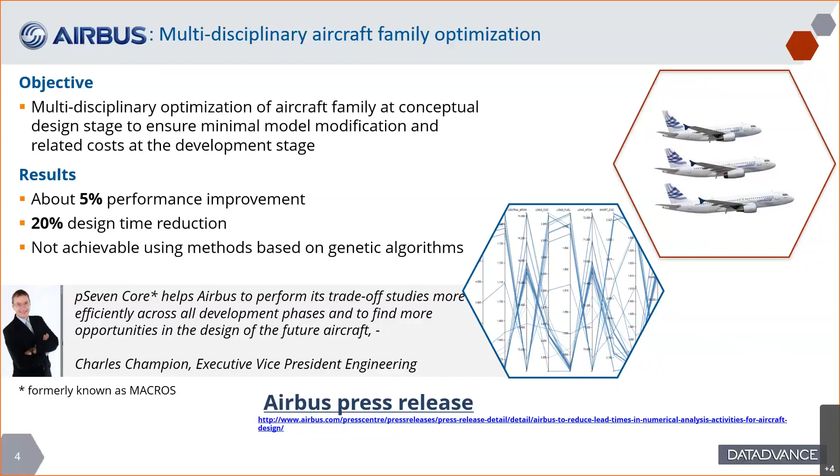Meanwhile, as I said, we expanded in other industries. So I just wanted to share with you some successes that we had with, for example, Japanese automotive companies. We have many references there. One of them being Mitsubishi Motors, where our predictive modeling technology allowed them to build some predictive models for combustion engines and export them into neutral formats

so that these mathematical objects representing the combustion engine are then subsequently used in a 0D, 1D simulation environment, so a multidisciplinary environment for acoustic simulation. That was the use case. We've done that because pSeven indeed allows you to export in neutral formats, such as FMI, for example, or an Excel sheet or C program.

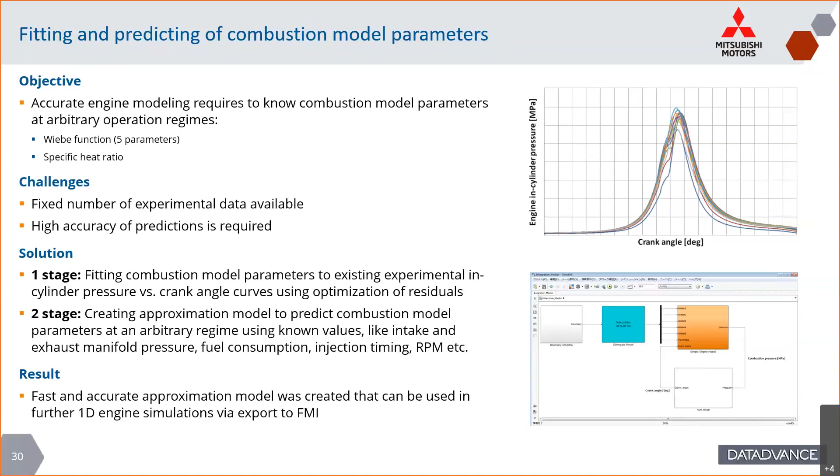Another nice use case in automotive is a well-known and challenging benchmark called MOPTA 08. I think it was invented by General Motors back in the days in some US universities. The challenge here is to tackle a very high dimensionality optimization problem with more than 100 variables, 68 inequality constraints, but within a given budget. And the budget, considering the dimensionality of the problem, here it was crash simulation, is very small. You see, it's less than 2,000 points for such an amount of variables.

It's definitely small. But thanks to our technology, we were able to tackle that problem and actually find the optimum value in an amount of points which is actually less than this total budget. So with 1,600 or so iterations, we can get to the optimum. That was a nice success.

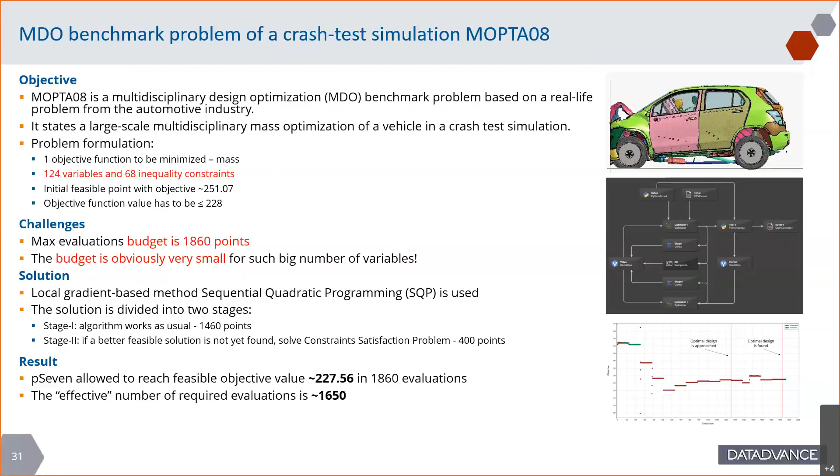So let me speak about the technology itself and what is different with our solution. So we fit in the fourth era, the era of cyber physical systems. And in that era, you need to provide software technology enabling, for example, the collection of data from an assembly line or a system in operation. Then check that data against predictive models and potentially take some corrective actions if something goes wrong, or to enhance the performance of the system.

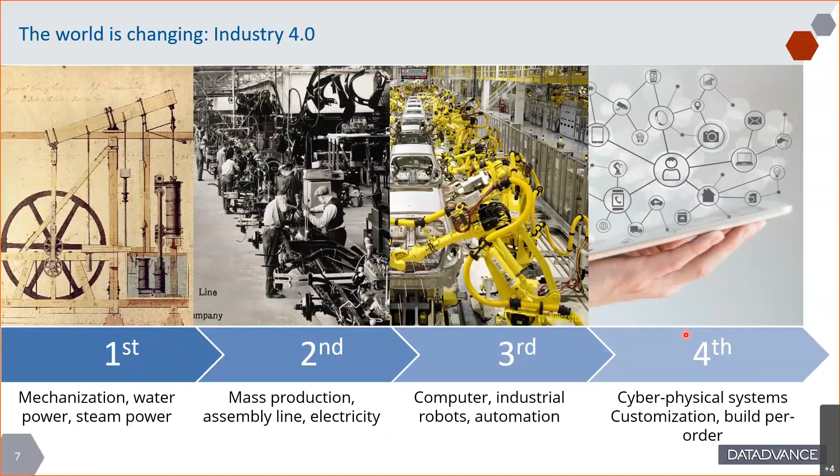So you have software discussing with the hardware, and all of that managed by algorithms and artificial intelligence, for example. So this is where we fit. If you think about all these buzzwords that you have on the screen right now, like machine learning, predictive analytics, or even MBSE, they actually all refer to the same concept, which is what we call a smart model. You can also call them a predictive model or meta model.

These are actually very light mathematical objects, mathematical models, which work as a function. So you provide some inputs and it gives you some output, but it does it in a fraction of a second. And this is the benefit, of course. The speed of these models is so high that by substituting a heavy model with this, you can then accelerate your design process.

So these models are, of course, the know-how in the company, and we know how to build some very high quality models, with a level of fidelity which is very close to what you can get using a 3D simulation or even test. So these models are built, as you can imagine, from data and using machine learning and artificial intelligence.

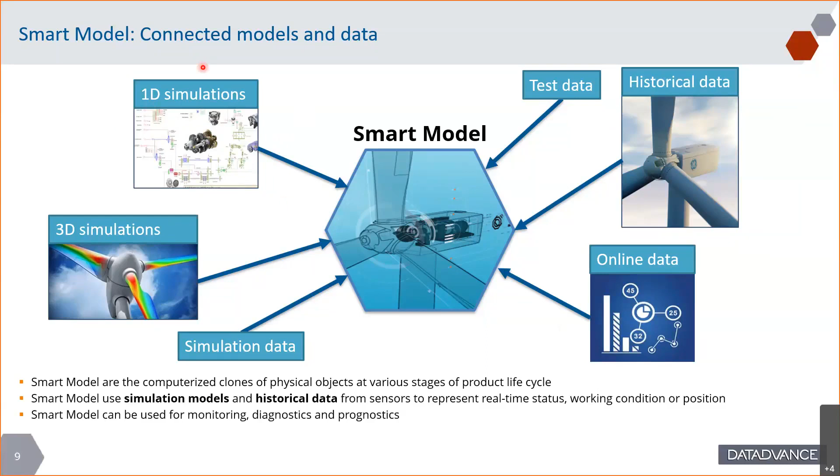The data set you can use might come from existing data, historical data, or you can, of course, generate such a data set by running simulation. And for this, you need, of course, a workflow engine. So that is a good transition to the main capabilities of our technology.

So we develop a product called pSeven. pSeven is an engineering process integration framework, which embeds also design space exploration capabilities and machine learning capabilities. So the main pillars are these ones. You have a workflow engine enabling the capture of any engineering workflow. It has to be very flexible, as you can imagine, so that you can capture any workflow, whatever the software, the zoo of software that you might need.

Then we provide design of experiment capabilities. So how to change all the parameters of the system and assess various combinations of these parameters in an efficient way to minimize the number of evaluations, so that in the next step, using machine learning techniques, we can produce some predictive models. And these predictive models can be inserted into the design process, which can be more global.

In that design process, you might find then optimization capabilities. This is where we are very strong. We provide optimizers that can find the global minima with a very limited number of evaluations, because in some cases they are extremely expensive and you cannot afford having thousands and thousands of simulations.

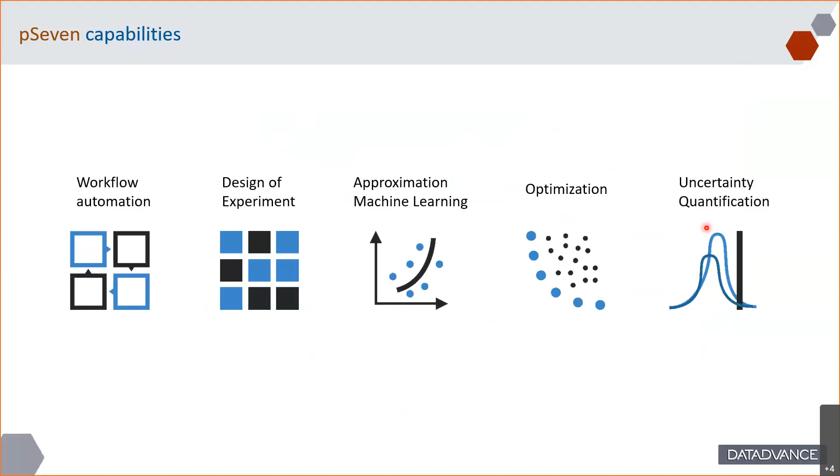Talking about the product line. We started with algorithms. Our roots are pure mathematics and algorithms. So the first product that was on the shelf was pSeven Core. This is a Python library. Then 2 years after that, we released the framework. This is a graphical environment. You will see it today, where you can capture your engineering workflow and run all these algorithms.

And finally, last year, so this is quite a recent event, we have released this cloud solution now called pSeven Enterprise. pSeven Enterprise is a brand new and native cloud architecture, which is derived, as you can imagine, from pSeven, to allow, let's say, collaborative work. I'll come back on this in the next slide.

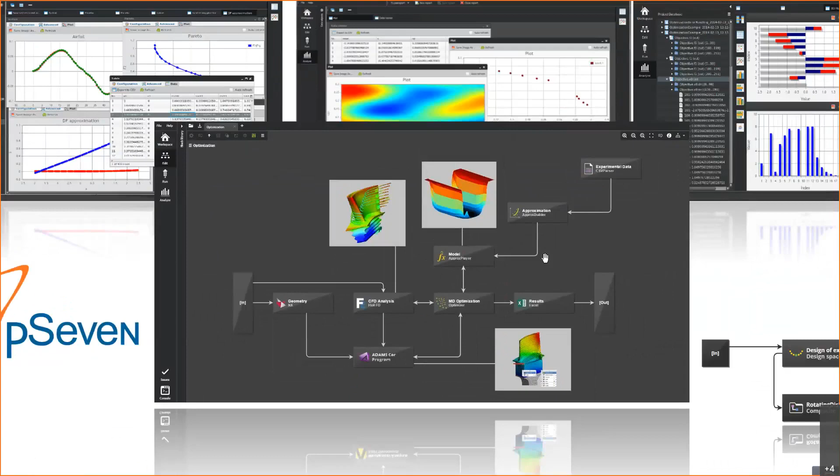So this is what pSeven looks like. The desktop version, at least, looks like this. You see here a typical workflow captured by the user, and this one combines, let's say, a CAD update with some simulation. Here it's maybe Adams. We have CFD simultaneously running. So this is really a complex multidisciplinary workflow. And all of that is actually feeding an optimization block here. The optimization block will take all the information coming from the various disciplines and of course search for the minimum of a given target.

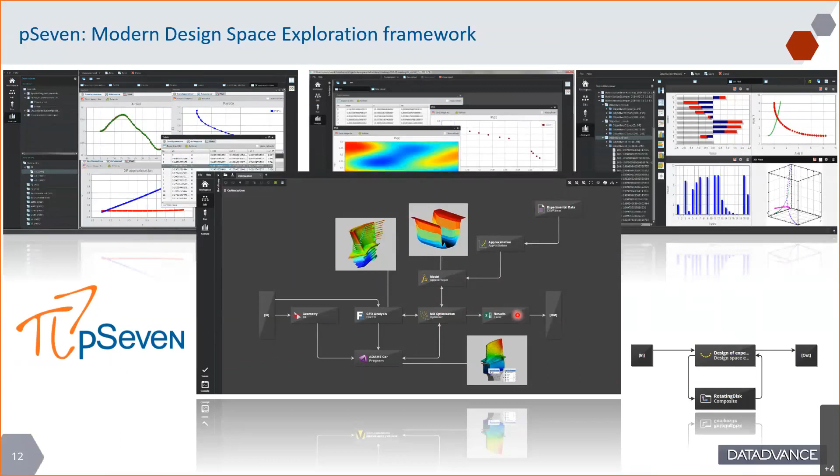You see another branch here going to the optimization block. This is a pure machine learning branch. So from experimental data, we train a model, and that smart model I mentioned before is actually executed in various configurations, and then it feeds the optimization block. So actually, the optimization block drives the execution of the model. And at the end, we get an optimum, and we export the results in an Excel sheet. So this is a typical engineering workflow and what you can do in pSeven.

As I said, we have since last year this extension of the technology to the cloud, and this is absolutely unique on the market. We have a native cloud solution here to not only execute workflows or to run some design space exploration task, but also to build the entire strategy and the entire workflow. So this is an authoring and collaborative authoring environment. It works like Google Docs or Google Sheets. So you might have several users connected simultaneously to the same workflow and working together.

So it extends the pSeven desktop application in various ways. Collaborative aspects, of course, is the main one. But because of the nature of the architecture here, the users can, for example, run many workflows simultaneously. All the workflows are delegated to the server, which runs in the back.

The other beauty of the system is that once a workflow representing a given strategy or methodology has been captured in the cloud, you can publish it as a basic app, which goes then in a specific area of the system called Apps Hub. Apps Hub is a library of small apps which actually run workflows in the back, but the end user doesn't see the complexity of the workflow.

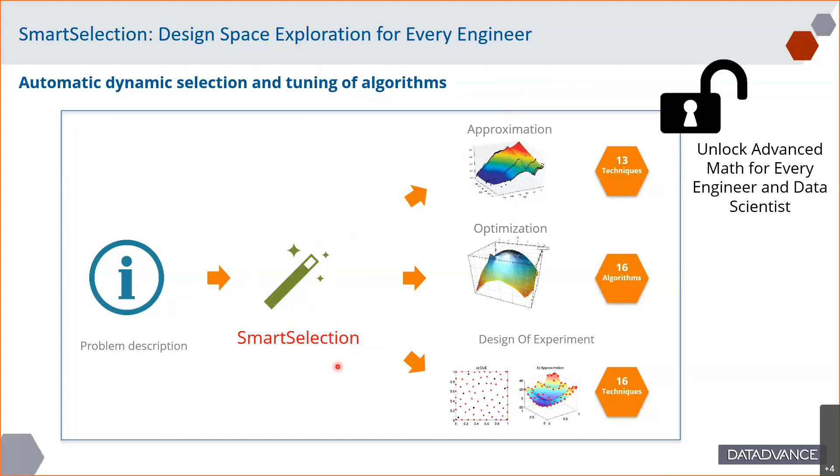pSeven is a quite modern interface, with an extremely powerful workflow engine. And this is what it looks like. So if you use it just to run, let's say, a workflow, it's extremely easy to run. You just have to provide inputs here, and you will get some outputs there.

So the workflow engine is something which does not just run external applications. It's more than that. It actually runs applications in a distributed environment and in heterogeneous IT environments. So there is a lot of work in the back to synchronize applications, to move files to the right machines, sometimes run on a cluster, sometimes on a local user PC, sometimes on a workstation. And we have to adapt to the zoo of software that might exist in any engineering environment.

So today, we will focus on Adams, but the type of application we can integrate is vast. We also have a user block concept, which allows you to define your own block that will then go to the library of blocks. If this is a typical software, let's say an in-house development maybe, or external software that you use very often, then you can have it in your library, and all the users will benefit from that block and can then build their workflow based on that application.

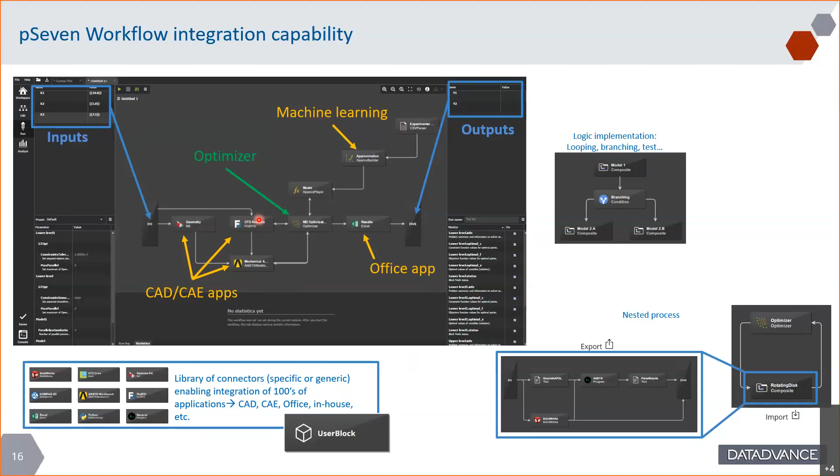So today, before I pass the ball to my colleague Anton, I just wanted to introduce the use case. So in the features and functions I have described before, you will see first how we can integrate an application like Adams, more precisely Adams Car, into a pSeven workflow. Then you will discover how we can set up an adaptive design of experiments strategy.

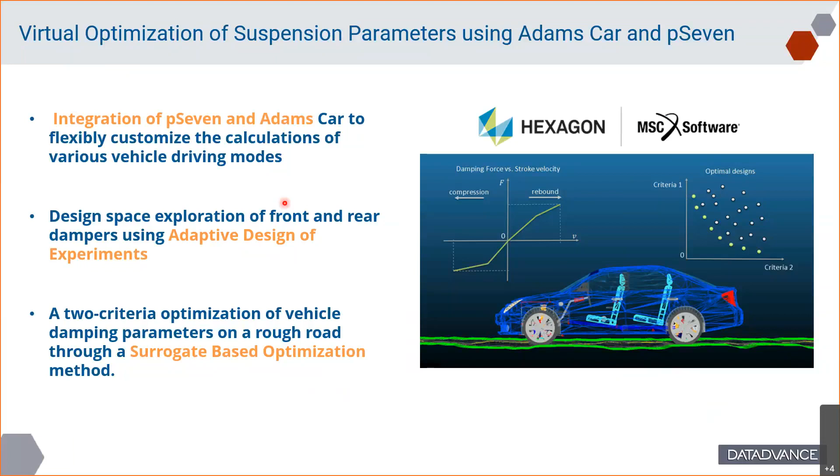And finally, you will see how we use surrogate-based optimization, known as SBO, to accelerate the optimization process for heavy simulation. So Adams is a fast and efficient product, but you can extrapolate that to finite element, for example, which can take hours before you get a result. And this is where SBO is extremely powerful, because you can get to the optimum value in a very limited amount of runs and iterations.

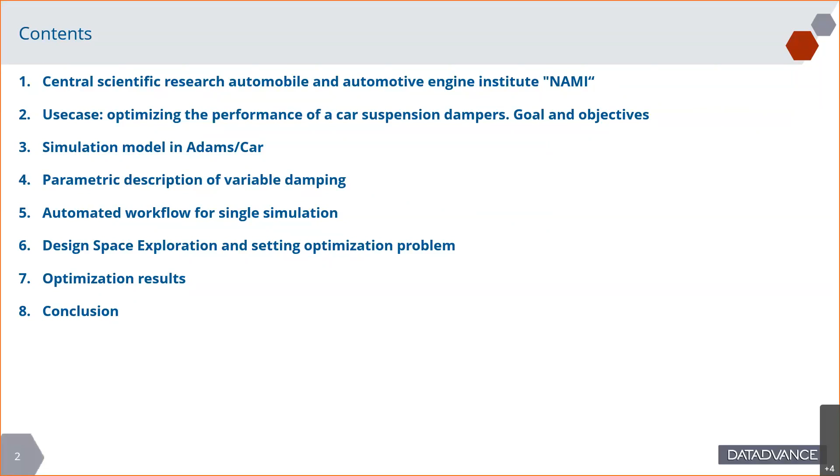So the project I will present today is the public version of a, as you can imagine, bigger project with NAMI, which is a Central Scientific Research Institute in Russia for the automotive industry. They cover all main areas of engineering services, starting from engines through bodies, transmissions, chassis, and even electronics and internal conditioning and accessories. NAMI

intensively uses simulations in their design processes and consulting, starting from 1D modeling for system level design, model-based systems engineering, of course, finite element methods for crash tests, for stress analysis in general, and CFD methods for aerodynamics. And in this environment, our product finds its place as the platform to automate some of the simulations and unify them into single workflows.

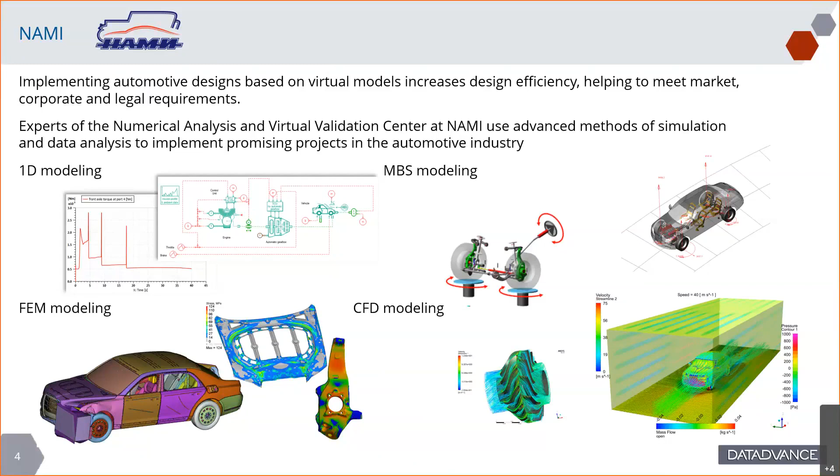I will skip this slide because I believe most of the participants are familiar with Adams and what it can do, and switch to the actual goal of the whole project and objectives we wanted to reach. And the goal is not only to solve the optimization problem. Well, indeed, that's of course the most practically interesting outcome, but also to create an automated suite for parametric analysis of the car suspension to ensure passenger vibration comfort under different vehicle behavior for different road profiles, and therefore to simplify everyday exploration of such problems.

So to reach that, we need to integrate the Adams car model into the pSeven workflow and ensure that we can do flexible simulation setup for different driving conditions. Then we need to apply design space exploration for our parameters of variable damping for front and rear suspension, introduce some responses we want to measure, which will represent the passenger's comfort, and as a final task, address the single and multi-objective optimization problems and identify the best combination of those damping parameters.

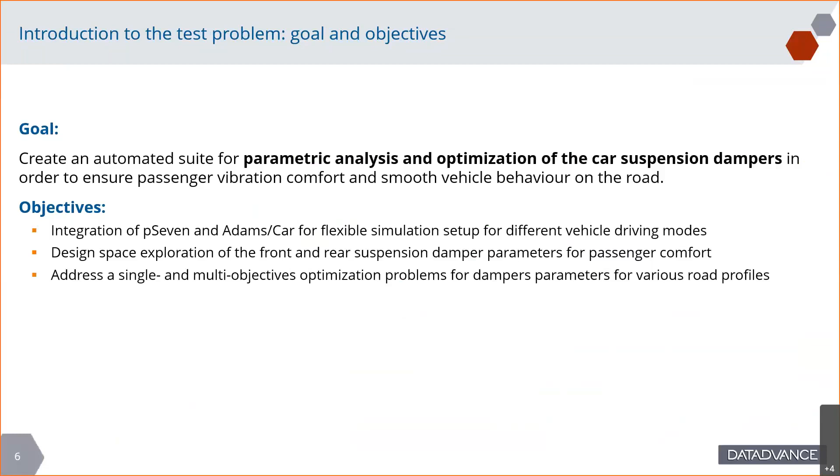The model here is, for public purposes, based on the standard model from the Adams database. We consider two driving modes. One is the full road, where we provide the full profile of the road, incorporating statistically meaningful obstacles and road behavior, and the single obstacle case, when we consider a particular fixed obstacle on the road, and therefore we can focus more on the detailed behavior for a particular case.

These two cases address two main investigation scenarios. So a basic study of the damping for fixed conditions and, let's say, average performance for some representative road profile. We will see later on that we can combine those scenarios in the form of the workflow, and this is one of the goals of the project, to enable this smooth and simple switching between different studies.

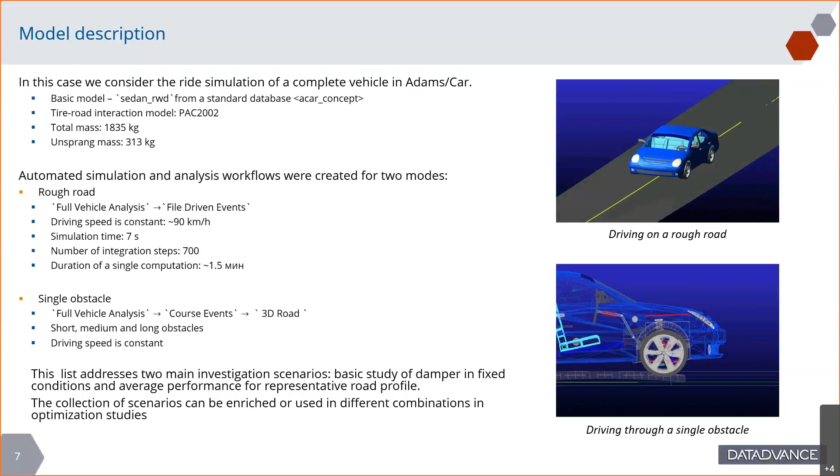Outputs. We want to investigate the passenger vibration comfort, and there are a lot of formulations in the literature based on different expert knowledge of how we can actually define those responses. In our automated workflow, we of course will obtain the outputs from Adams, which are displacements, accelerations, forces, distributions of energy densities, whatever things we can extract from our Adams model. And on top of that, we need to somehow define what we call passenger comfort.

Again, a variety of options exist, but we focused, at least in this demo and this public version, on several obvious things. We consider angular movement and acceleration, so pitch, also roll, and the vertical movement of the chassis altogether. And we consider the root mean square of these values over the driving period we actually simulate. That's what we will use most in our studies.

There are other outputs which are also monitored, so saved for additional analysis if you want. And for each characteristic, we also perform a transformation to the frequency domain, and therefore we can analyze the amplitudes in the frequency domain, which opens the door for more sophisticated formulations of the problem, where we actually narrow the range of frequencies where we're looking into our responses.

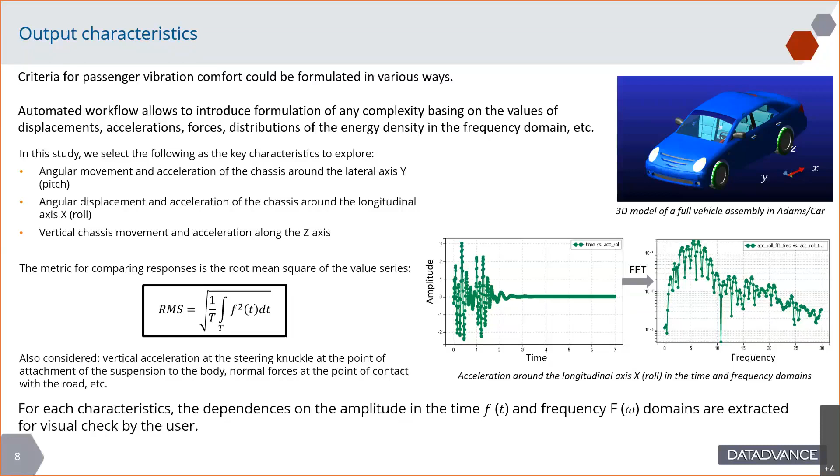Why stay with this parameterization? From one point of view, it's simple enough to be clear for everyone. On the other hand, it can provide really different shapes of our curve, thanks to the fact we don't consider it as symmetric, so we consider different slopes for compression and rebound. And you can also imagine that it can be extended to be even more non-linear, approaching the full spline concept where we control more control points in our curve.

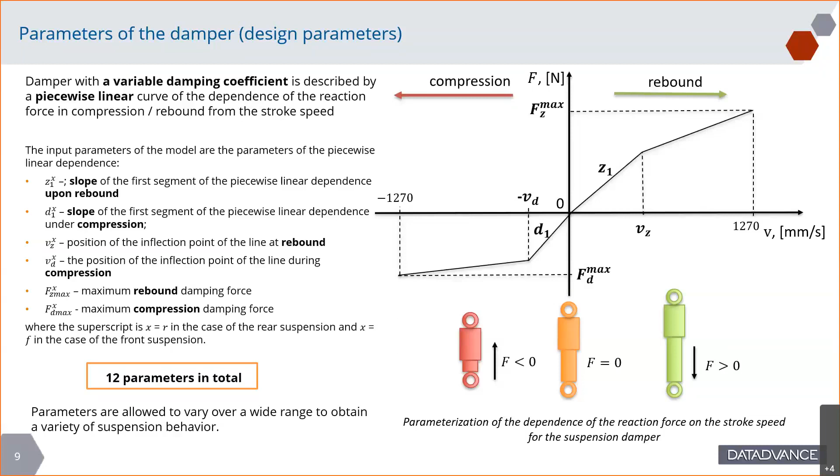One comment, I won't dive deep here, but of course, when we introduce our parameters as independent features of the curve, we can get many different curve shapes. However, we have bounding lines which are coming from technological feasibility, and we don't want to violate those bounds, and we also cannot afford to have the slope of the second line of the segment be negative. This all will be represented as constraints for our parameter combinations, which we will need to satisfy.

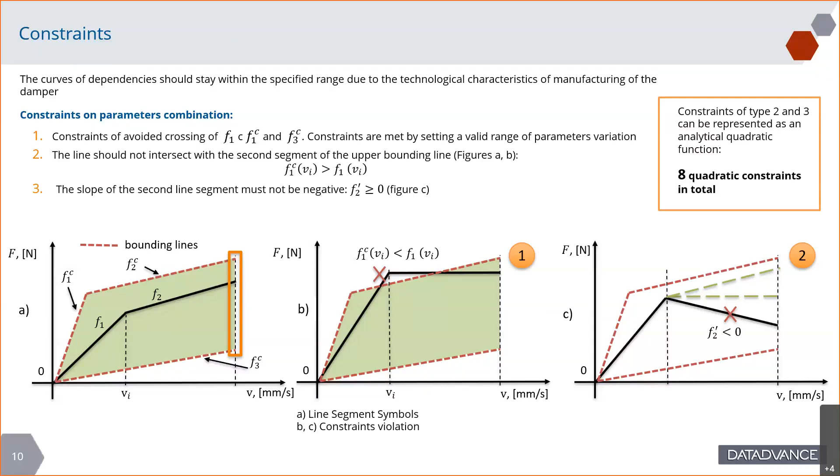Okay, that was the intro of the model. Now we need to actually switch to the study. What steps do we need to perform to solve an optimization problem in a pretty generic case? First of all, of course, we need to automate our simulation and obtain our automated source of responses to analyze them in an iterative way with different parametric study methods, design-space exploration methods.

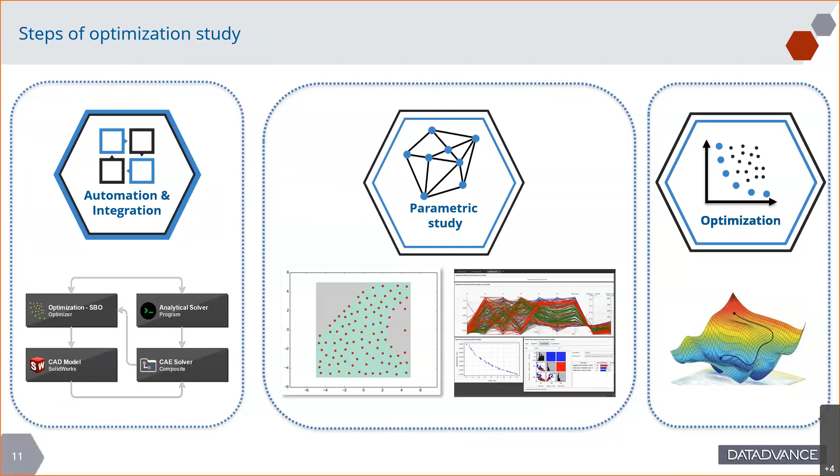Then we need to perform a basic parametric study just to ensure that our model is stable enough, that it behaves as we want, to investigate the basic dependencies, maybe reveal some important features. It will help us to finalize our optimization problem statement and the problem we actually should consider. And in the end, we switch to optimization, where we have our targets to be improved, and we're actually looking for the best configuration.

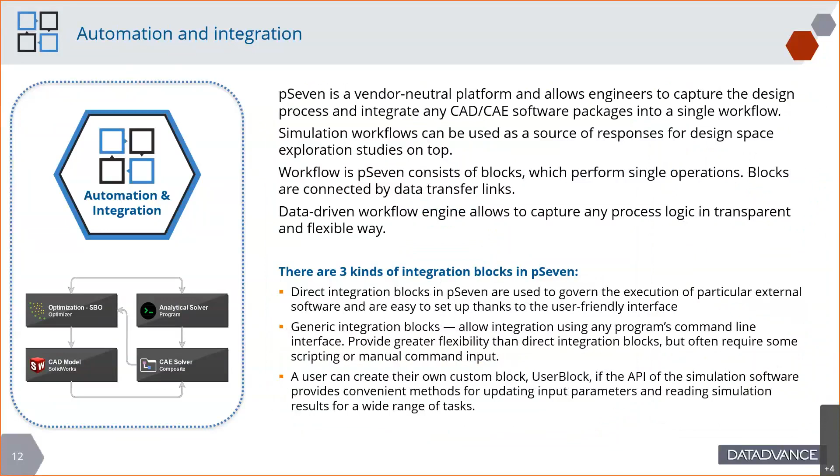I will skip this part about the workflow basics. Laurent covered that in his introduction. And I will just show you the workflow in general and switch to the live demo. So again, as the main comment, probably I will switch it now. Yeah, so now I'm in pSeven.

Somewhere in the background, I have my Adams model and all associated files I need to modify in order to set up my simulation. Here we utilize Adams in batch mode. So we have the program block here in the center, which actually launches the Adams simulation from the command line. And in order to do that, we need to update the solver session file, where we change the road settings, the speed, the solver settings if we need to tune something.

And we also need, of course, to update the definition of our damping coefficients based on the parameters we introduce as users. This is a workflow for a single run. So we actually should type in or copy-paste some parameters of our damping curve. And in the end, we will get our responses. In this place, I can edit my workflow. This is just a capture of the flow, and the links represent the data transfer and file transfer.

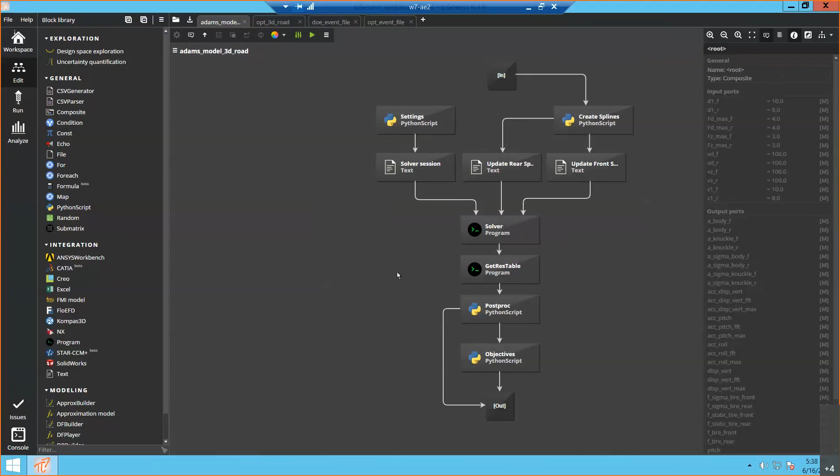And if I switch to the Run tab, I can actually see my inputs, where I can modify them, and the outputs I will need to get. I will probably modify something now. It's the maximum force. Again, it may be copy-paste, or here I will do it manually for these two values. And once I provided all the inputs for my damping curve parameters, I can run the simulation.

And you will see that it just starts executing the blocks. They are flashing. It means that their step is going on. We update our files, and we actually run the Adams solver in the background. It will take us some time. What else do we have here? We have this part where I have parameters. Those are not the definition of our damping curve.

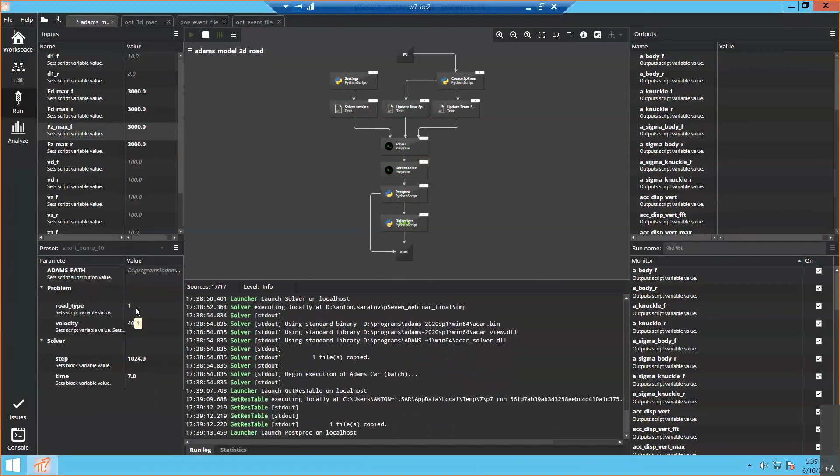Those are more the settings of our study, including the path to Adams if I want to transfer the project to another machine. I have the road type, where I can switch by number between different road profiles. Therefore, I don't even need to go to Adams anymore if I want to study different combinations of my road types and velocity of the vehicle. And well, it's finished, and now at the right I have my results.

Of course, those are just numerical things, and it's not very convenient to check, but I can switch to the last tab in pSeven, which is Analyze, where I have presets of my results. Again, since it's a single run, what I have is a plot of my actual damping curve for the given parameters I specified, and the outputs.

In the form of the plots as a function of time, I can see how my pitch, roll, and vertical displacement evolve during my ride. And also in orange, I can see the same outputs in the frequency domain after Fourier transform. So if I want to identify a particular frequency range and see the amplitude, I can do it. And more viewers are available, in fact, for all of the outputs we consider.

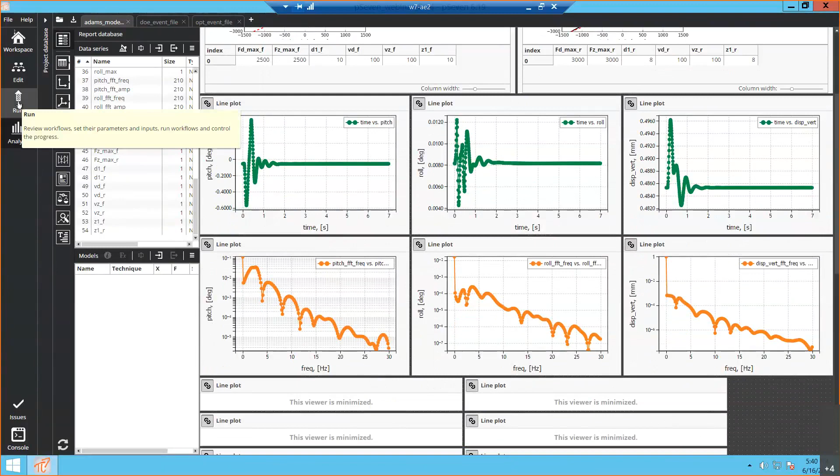So already this single study, single run, is useful because you can change all settings you actually promoted to be available here in the workflow, not actually changing the model in a manual way, and perform fast checks for different assumptions you have, let's say, in manual mode.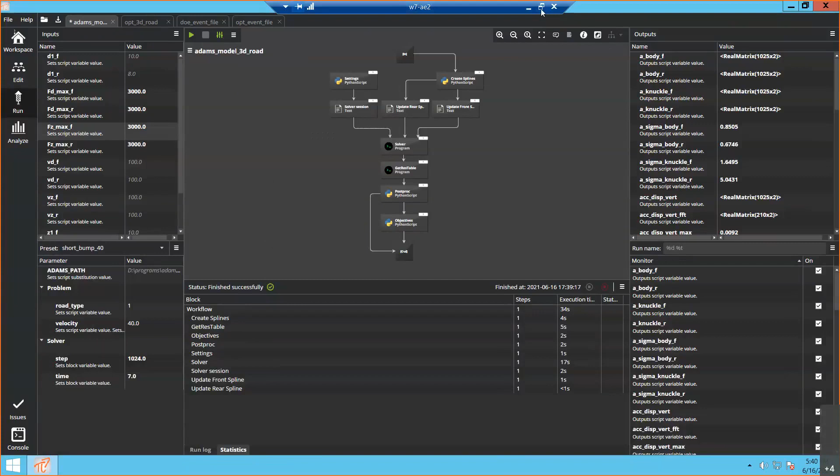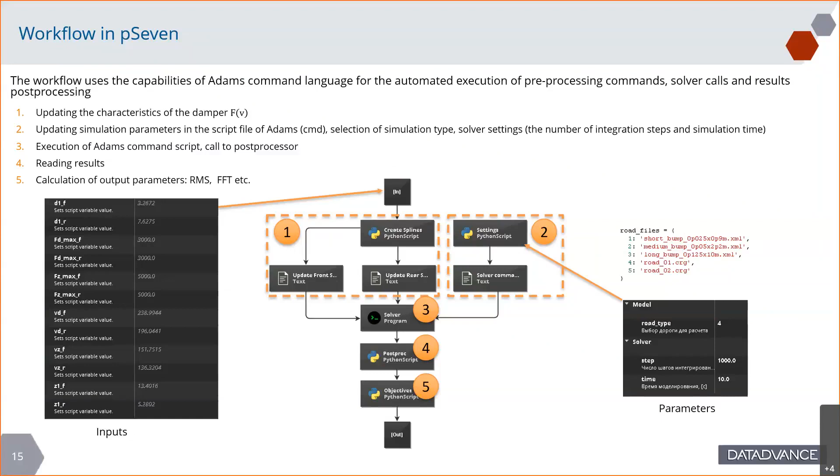However, of course, this workflow for us will be a basic brick for further study, which is design space exploration and optimization on top. So now we have our block, which gets our inputs, which we want to change and search for the optimum configuration, and provides the outputs we actually want to analyze. So next step, design space exploration. This is a general concept.

First of all, we will perform design of experiments, which is, in simple words, a uniform sampling in our ranges for variables, for parameters, in order to investigate how our responses behave, measure the sensitivity of the outputs with respect to the variation of inputs, and in general estimate our model behavior, get insights for the optimization problem statement, and even reuse the data we gather in this step for surrogate-based optimization as an initial sample.

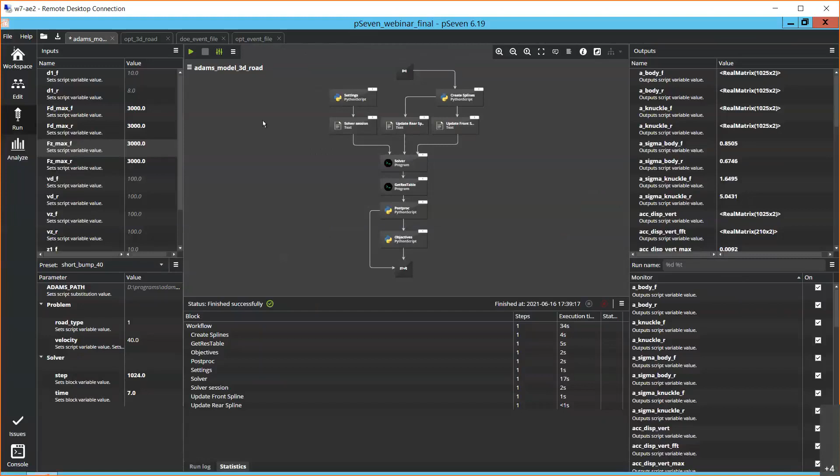pSeven provides many DOE techniques, and we have smart selection, as Laurent mentioned, to choose the most appropriate for the particular problem. Again, I will switch directly to the live demo and show you how the workflow for the parametric studies looks. And this is here. So what do we see on this screen? We see blocks, which are in fact folders. If I go inside this folder block, I will see immediately the same workflow we just checked.

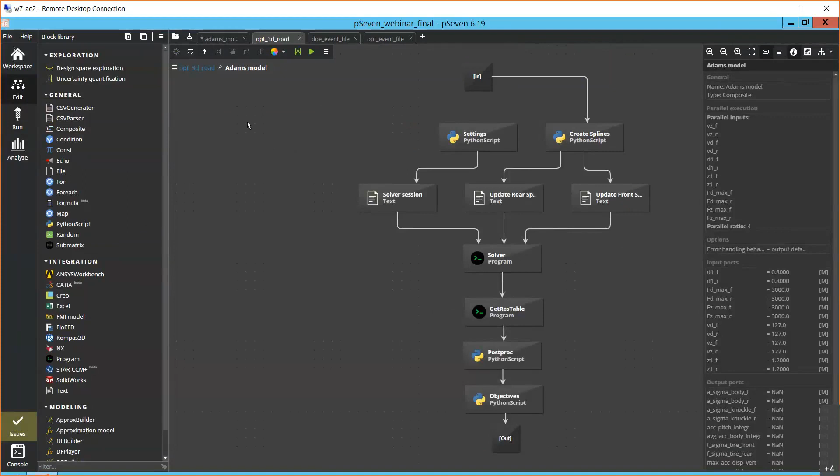So we used the workflow for single run as the basic block for our cycle study, which is in this case DOE, which provides point by point and gathers responses from our model. There is another block also here. It's called quadratic, and this represents the function which allows us to evaluate constraints, which I mentioned.

Those are, let's say, auxiliary compared to the simulation, but really important because we want to have only the curves for damping which satisfy our technological requirements, which can be reproduced by technology. And it's all governed by this design space exploration block. And if I open it, I will see the main settings. So what do I have here? I have the list of parameters I want to change.

I have the bounds for those parameters, lower, upper, and those are parameters describing my curve. We can consider them as independent, as typical for any parametric study. They are all continuous. And here on the bottom list, I have all the outputs I produce from my model by calculating the sigmas and frequency domain sigmas, and they all have type evaluation. That means I only need to collect them and explore how they scatter in my design space.

However, here I have the first line, this quadratic constraint. So in order to ensure it will be satisfied for my design of experiment, I will just switch it to constraint. And you may notice that the technique for the whole study now changed to adaptive design. That's how smart selection works. You specify your problem, you specify what you want to do with your outputs, and you get the proper technique, which will then be tuned during the run, also automatically.

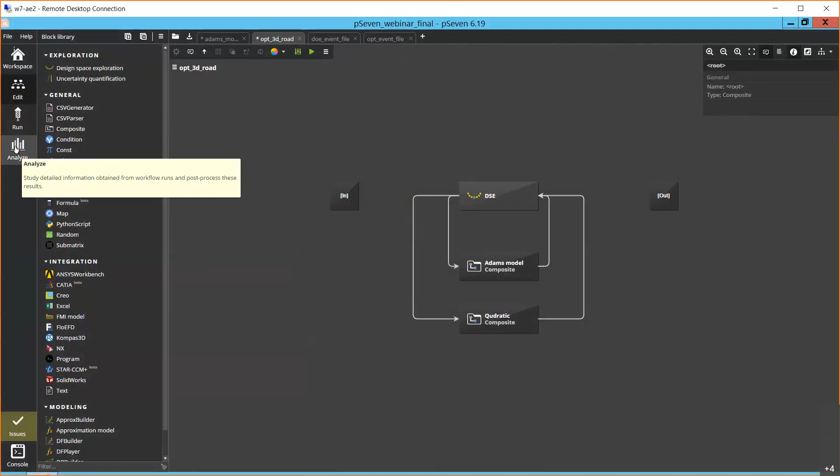That's it for the settings for adaptive design, where we will investigate only the configurations, combinations of parameters, which satisfy our constraint for curve shapes. In the analysis for this case, we have, for example, the scatter plot and the correlation plot. Here I have only some of the outputs plotted, one versus another.

So I can see, for example, that here in the selected plot, the acceleration for the roll and the acceleration for the vertical displacement are competitive functions. So for our study, we need to reduce both of them, but we cannot actually go to this corner, and we see that there is a boundary.

These are nice candidates to be competitive target functions for our optimization, because here we see the problem that we cannot evolve them all together, which is not the case, for example, here, where we see that they evolve in sync. So reducing one, we can reduce another. That can be complemented by more formal values of correlation coefficients, which show us that these guys have pretty strong negative correlation, which means that they will evolve in different directions if we change parameters.

We can also, for design of experiments, check the visual part in parallel coordinates and maybe filter some of the ranges and see how it affects our scatters. And one more thing we can check is the dependency analysis, where we consider a particular output and we see how it's affected by the changes in different inputs.

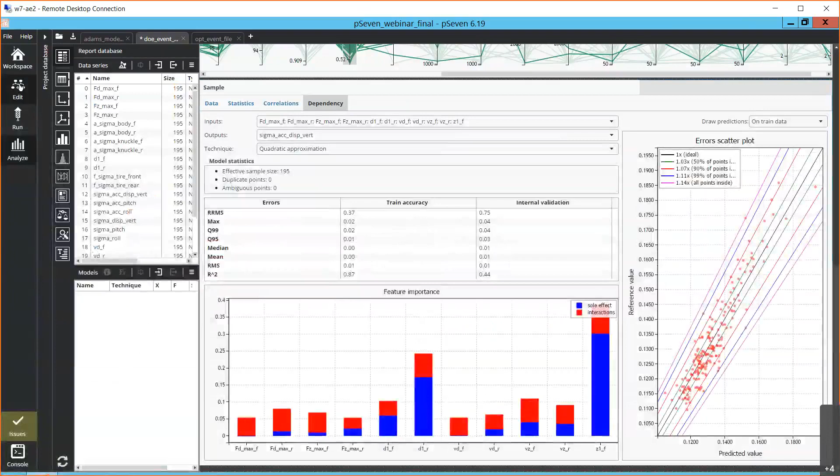Switching back to pSeven, how we will actually set it up in our block. Going back to edit, I will use the same workflow, same block, and all I need to do is go and find my sigma vertical displacement. Sorry, where it is. Yeah, sigma roll. It will be my target for minimization, and sigma vertical displacement also my target for minimization. I can add more targets, but it will be multi-objective optimization, which will be harder to analyze in terms of results. Or I can keep only one target, and it will be effectively a single optimization problem.

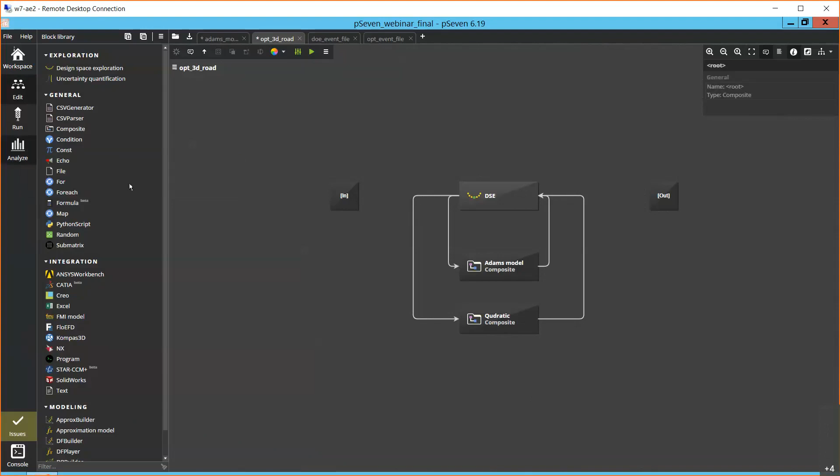Thanks to the fact I promoted all of the outputs I measure to this list, I can play around with the settings and study different problems with a couple of clicks and some time for actual evaluation of the problem. So now I have my optimization setup ready with 2 clicks. I can run it. Well, it will take hours, so I will immediately switch to the existing report for optimization. Again, as I mentioned, this is a 2-objective optimization study. I have my acceleration roll and acceleration for vertical displacement outputs as competitive ones.

We want to reach this corner where all responses are as low as possible, and we have a boundary which prevents us from going there. This is a Pareto frontier of competitive optimum results, and we can explore what we have. And by pointing out or just selecting, we can actually see which pictures it goes. So if I change it, it will redraw the actual plots.

My laptop screen is a bit smaller than expected, but it's like a dashboard where we can actually analyze your result. And again, as for single simulation, when you rerun your problem, you just update this report and it automatically will grab the new results and show you the new Pareto frontier, and you can see what you get for your new cases.

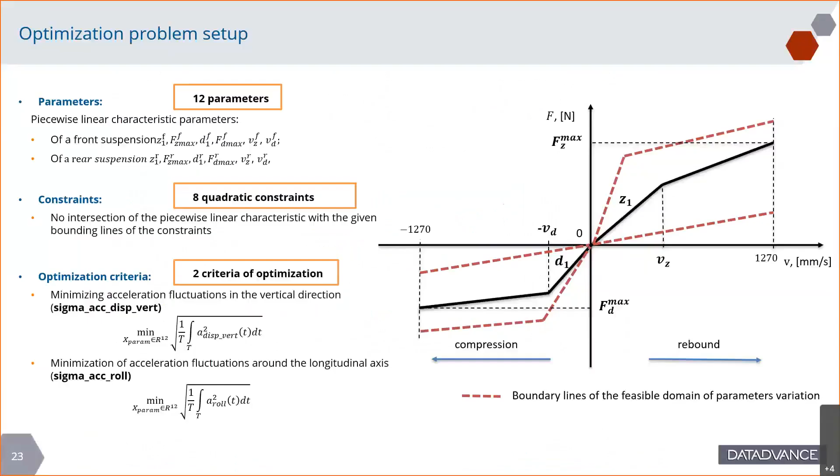So we applied, automatically selected by pSeven, a surrogate-based optimization technique. This is a global technique, which is more important for us in this case than the fact that it's evaluation saving, because simulation in Adams, as you noticed, took us about a minute. So we can allow multiple runs. However, we want to make a global exploration, and that's another benefit of SBO: it is by nature a global method. We discovered 36 Pareto frontier competitive points within 600 iterations, which is much less than you can expect from well-known gradient-based or even non-gradient methods.

And the overall computational time here was about 10 hours, which in fact was one of the goals of the whole story, to enable these studies to be performed overnight. So imagine at the end of the day, you formulate some assumptions, you run the optimization campaign, and in the morning you get a report which you just need to update and investigate what's going on. So thanks to SBO, it was possible.

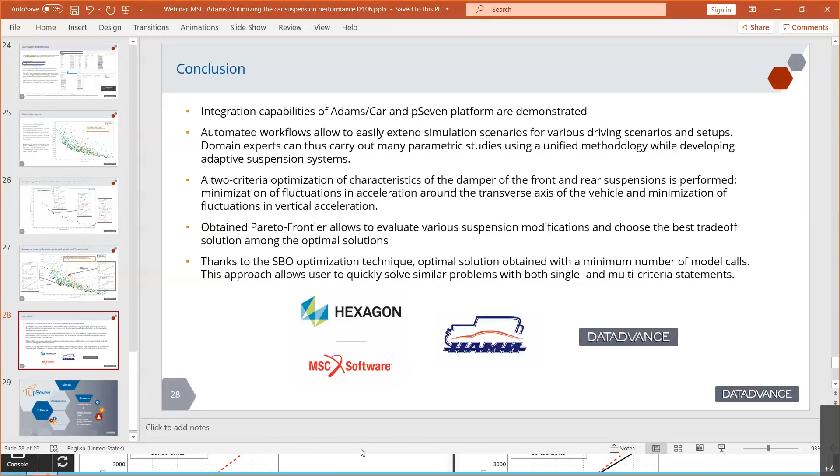There's another question that I've received. Can you use pSeven to calibrate time-based responses? I'm guessing the user wants to take an output that varies in time and calibrate some of his model parameters to align with that response. Can you guys calibrate to a time-based response?

Yeah, let's consider this example which we have. Imagine I have this roll response in time, which is in fact the time-dependent response from the Adams simulation, and almost all of the responses from Adams simulations will be time-dependent functions. If I have a curve which I want to match, I can do it. I can add to the workflow another block which will compare the target curve with my generated curve

to form the target to minimize, the difference between those two curves. The rest will be almost the same. We run the Adams simulation, get our time-dependent curve for a particular set of parameters, compare it with the target one, return the difference to the optimizer, and it will try to minimize it, which will give the match.

I especially pointed out that there will be a block which will calculate this difference. Typically for real-life problems, we should be careful in the way we define this difference. In many cases it will be the standard least squares formula, but sometimes we need to address particular parts of the curve with more accuracy, or incorporate the knowledge on the errors in particular measured points. But yeah, indeed, this is one of the scenarios, and definitely there's an optimization problem.